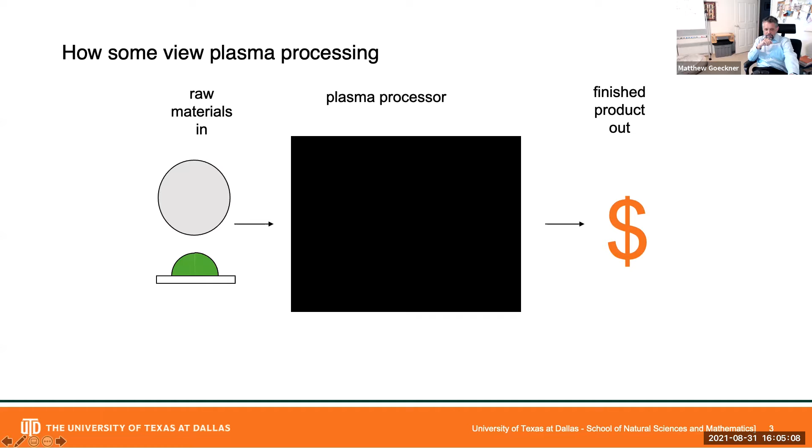Oh, please let me go on. There. Okay. So when I was at Princeton, I put together this slide for the graduate students about how some people view plasma processing or plasma physics in general. You put a bunch of raw material in, it's a black box, and out comes lots and lots of money. The reality is a little bit different. You put raw materials in, you're not quite sure what goes on, and out comes some money. And really, the desire here is to understand what's going on in that box better, so that instead of a few cents out, you actually get a lot of money out.

A case in point, plasma processors that are used in the semiconductor industry, a single reactor might sell for $5 million. I believe David has something that he works with that is on the order of $100 million for patterning. Now, it's not quite processing, but it does use plasma physics. And that's a lot of money to throw at something. And on top of that, you're working in a clean room, and it's thousands and thousands of dollars per square or per cubic foot. And you're trying to make do by punching out a bunch of devices that are 5 cents a piece.

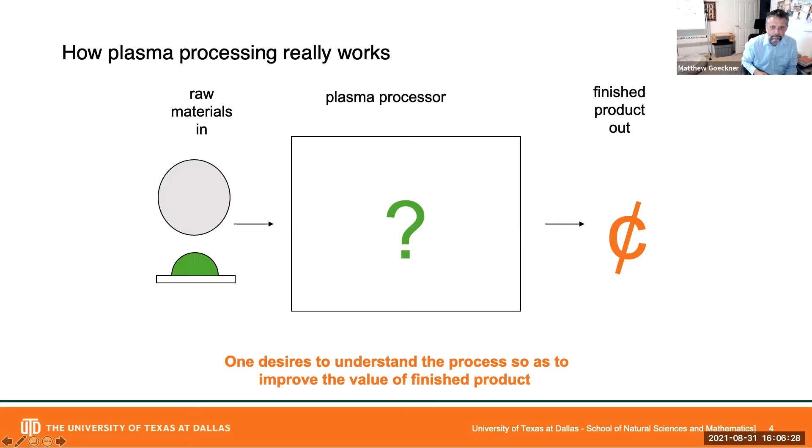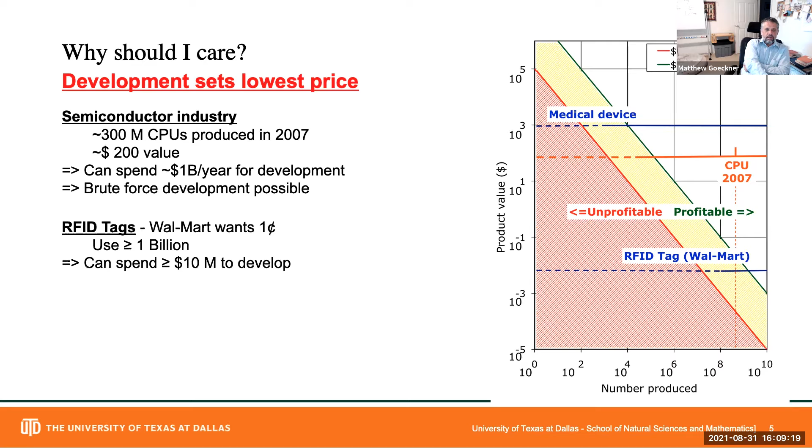You would have to have billions of them, tens of billions of them, and you'd have $10 million to do all of the development for it. And so it becomes very difficult to actually make this work. In order to make this have economic sense, one needs to really understand what it is you're doing so that you can, from the get-go, come to a solution that makes sense for whatever process you're trying to develop. And here's what I said in words. You need to understand the fundamentals.

You will have the sheath at the edge of the plasma. The ions will be accelerated across the sheath. They'll bombard the surface, giving energy to the surface, allowing reactions to occur. That's one way in which these things can interact. Surface kinetics: you can have processes occur on the surface, liberate gas that goes into the gas phase chemistry that interacts with the electrons, changing the electron energy distribution function. And so all of these things interact.

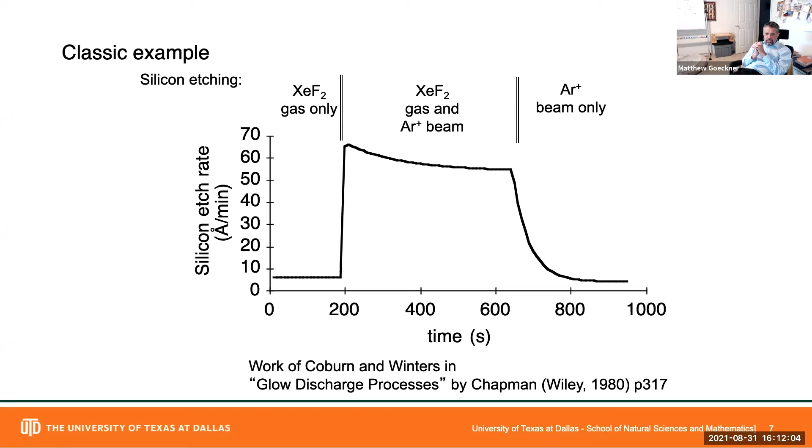They then pumped out the gas, and now you have just physical sputtering. You're basically doing billiard balls on the surface, knocking the surface atoms off. And you go back to about 7 angstroms a minute of removal of surface material. And so you have this interaction between the chemistry and the energy that's brought to the surface, the bombardment due to the ions. And this happens in plasmas. And this allows you to do things that you cannot do in any other system.

Plasmas have been known for 150 years. What have we learned? So in terms of understanding these interactions, the simplest thing that you can do is what's known as a global model. It is essentially 0 dimensions in velocity space, 0 dimensions in physical space. It's what the plasma system is doing as a whole. You ignore the plasma sheath, you ignore the surface, well, not the surface kinetics, you ignore the variations across the system. And this allows you to get some sense of what's going on in the system.

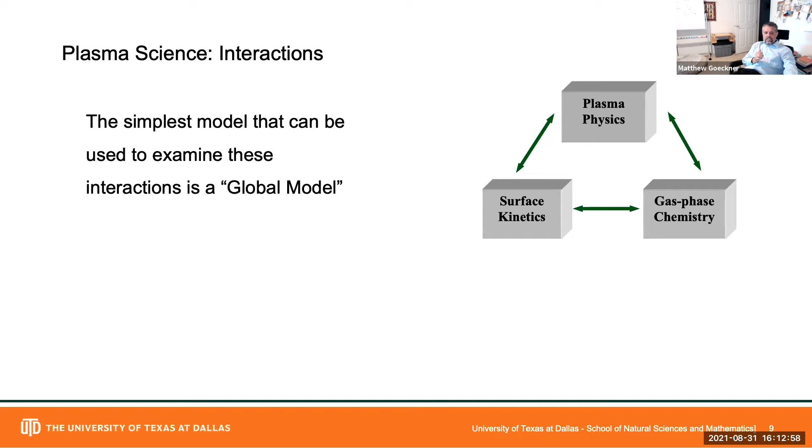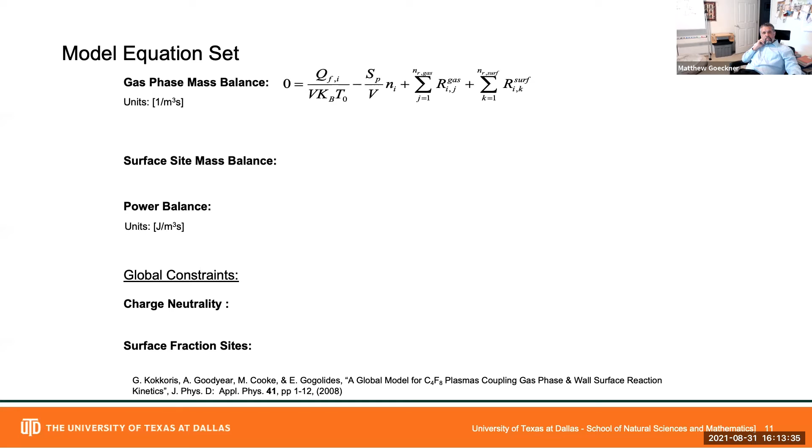So this is work we did where we developed our own version of a global model. It assumes it's well mixed, and you can use it to study molecular wall interactions, among other things. And it has potential to save a bunch of time and resources. So this model looks essentially like this. You have a gas phase mass balance where you're producing the gas through some process. You're either pumping it in, pumping it out, breaking it up, or recombining it. You have surface processes.

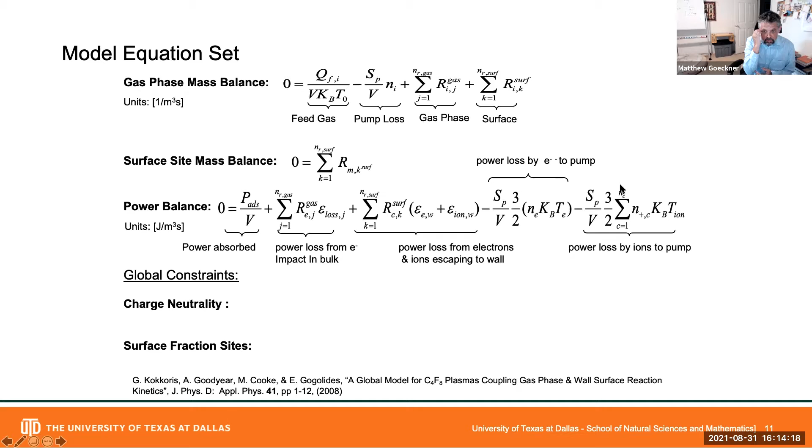You have a power balance where you're depositing power into the system through your electrodes, either through the electric field or the magnetic field. There's power absorbed, there's power lost to the electrons. The electrons and ions go to the wall. There's power lost to the pump. Electrons will get sucked out of the pump, ions will get sucked out of the pump. There's a couple of constraints, charge neutrality, and then there's the surface.

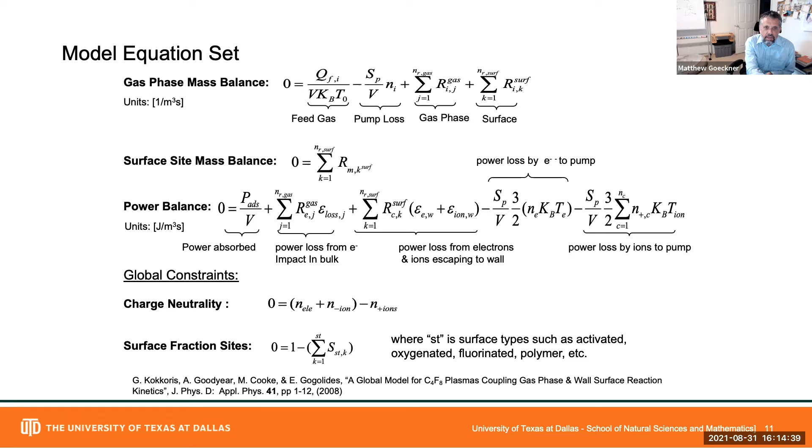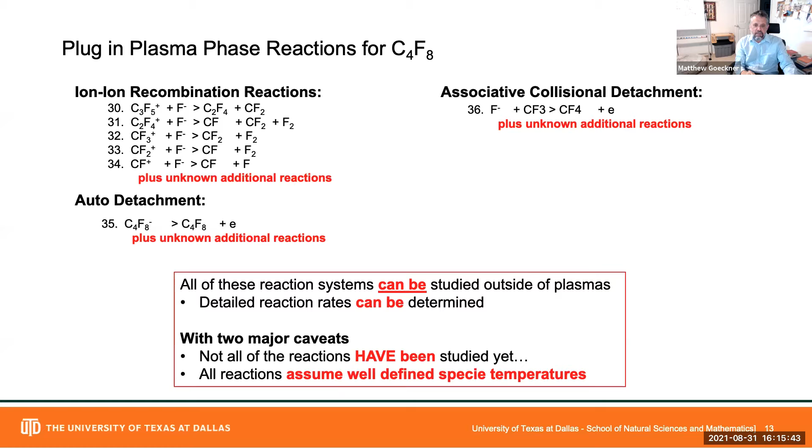You have ion-ion recombination processes. You have detachment. You have associative collisional detachment. And there's a bunch you don't know. But we can kind of guess what these reaction rates might be. And in the right system, we can actually determine values for these. There's 2 major caveats. Not all the reactions have been studied. We don't know all of them. And it's assumed that all reactions have well-defined species temperatures.

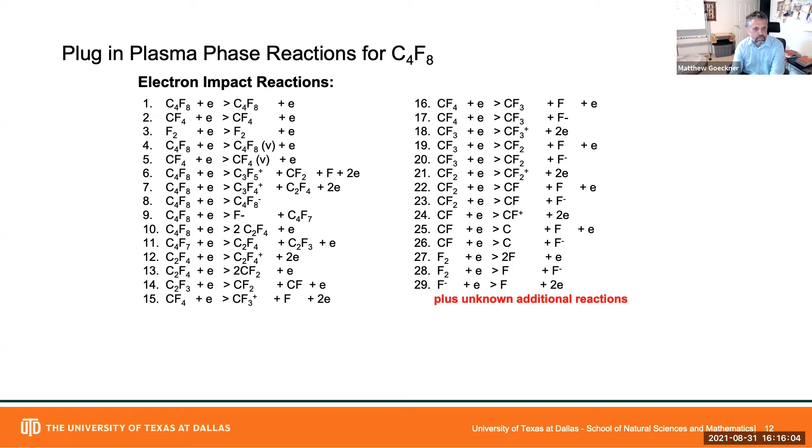So here, for example, the electron energy distribution function is going to play a major role in how this reaction occurs. Slow electrons will typically not do it, fast electrons will. So we put this together, we plotted out what we expected the neutral densities of different species might be in the system as a function of power that you put into the system. We were not the first people to do this. Kokkoris did this a couple of years before us. We got the same answers that Kokkoris did, or close to the same. Not surprising, we're using largely the same method.

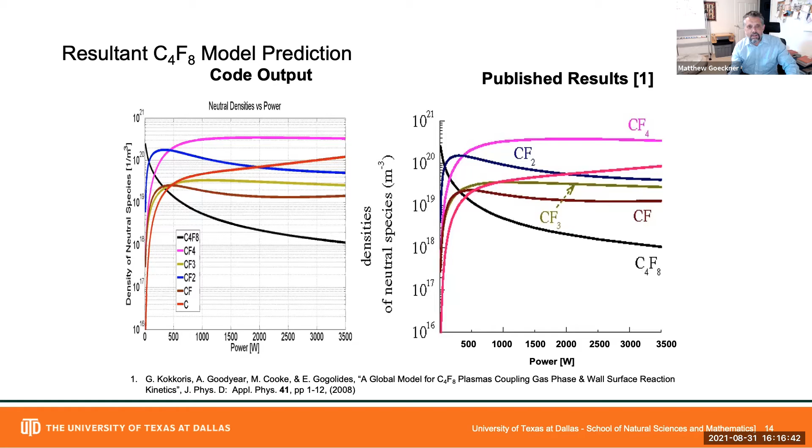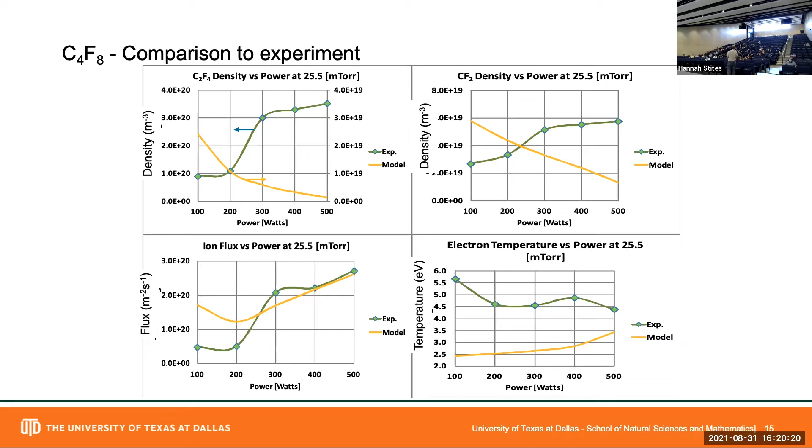And what's the inhibitor on the sidewall? Yes. Teflon, CF2. Yeah, okay. CF2N. It's a long chain of CF2N. Yeah, Teflon. Okay. And so this CF2, actually in our experiments, we were able to show that this C2F4, that a large fraction of it was unterminated. So you can have a stable molecule that's C2F4, where the carbon is a double bonded system.

But you can also have an unterminated version of this, where the CF2 has recombined in the gas phase. We were able to measure that recombination rate. So both of them, the unterminated C2F4 and the CF2, will produce Teflon all over the place, or a Teflon-like material. It is not truly Teflon because it's not truly a polymer.

And you're going to deposit this all over the place, including the sidewalls of a trench or a via that you're etching, or the sidewalls of your reactor. And eventually you've got to clean it off of the sidewalls of the reactor. Otherwise you peel off thin layers of Teflon. It's like Teflon tape that you use as a pipe dope, essentially. So you know the Teflon tape that you can get for screwing together two pipes for plumbing. It will look like that on the inside of your system.

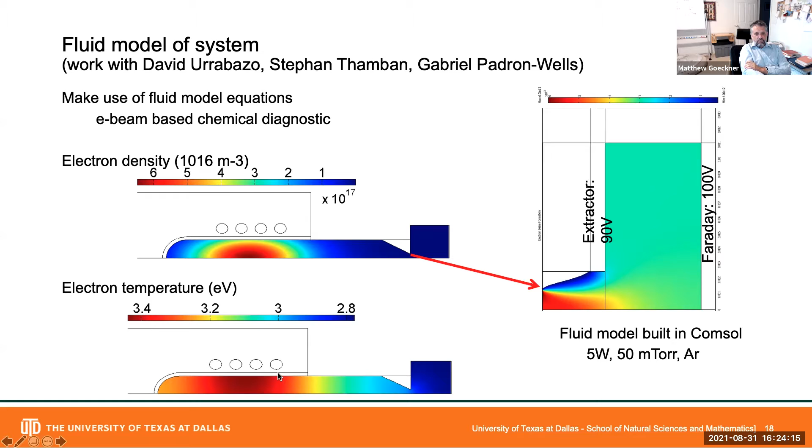So we did this model to study what was going on in the system. And we were able to plot out what the gaps should look like. And it was close, but again, it got back to the point of, with this fluid model, you're making assumptions about what's going on in the electron source. If I have a bunch of high energy electrons in here, it's going to change the flux of the electrons that come out of the gap because of the potential structure.

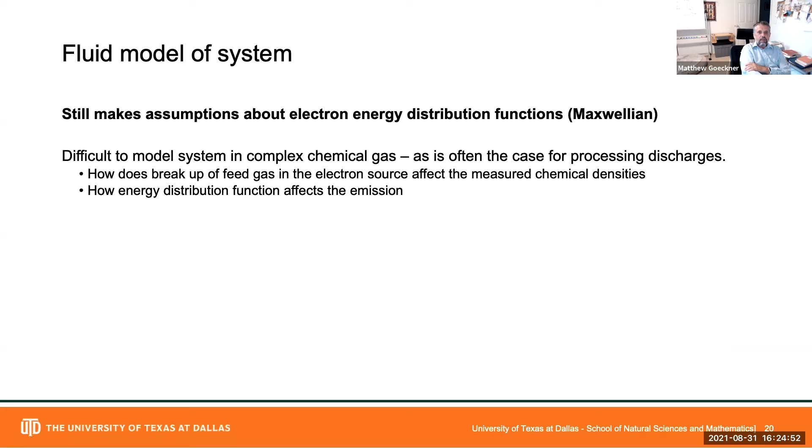Things become even more interesting. We've done a lot of work in pulse plasmas, where you're turning the plasma on and off at the kilohertz range. You might be driving it at the megahertz frequency, and then you turn it off and leave it off for a fraction of a second and turn it back on, and what happens? You can have organic precursors. There's a huge amount of potential work that can be done here for biomedical applications. The list of organic precursors that you could put into a plasma is pages and pages long.

Atmospheric pressure plasmas is something that we're working on quite a bit in my lab. What happens in those sorts of systems? Can you change how that system operates by changing how the plasma is set up? Is it really in thermal equilibrium? That's usually what people assume for some of these atmospheric discharges.

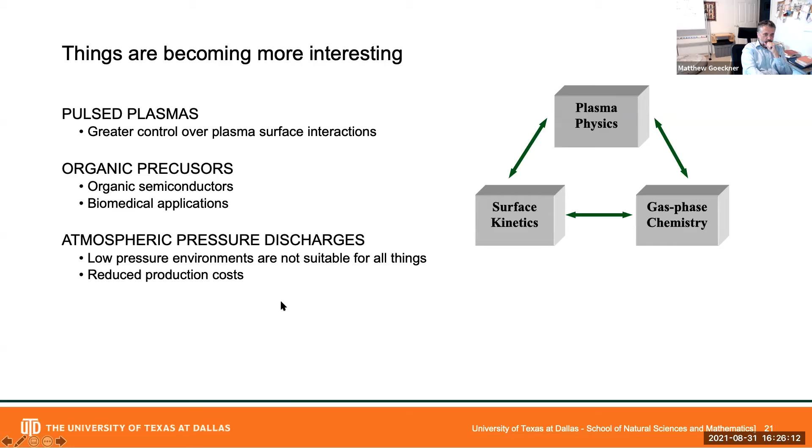So here is an example of a pulse discharge, where we're pulsing it at 1 kilohertz. It's a square wave pulse. The power is 13.56 megahertz. The system looks like this: there's a powered top electrode, there's a plasma, there's a lower chuck where you might put a wafer. When we turn it on, we see a bright glow on one side. So that would sit right about here in the system. And then we see a glow in the middle.

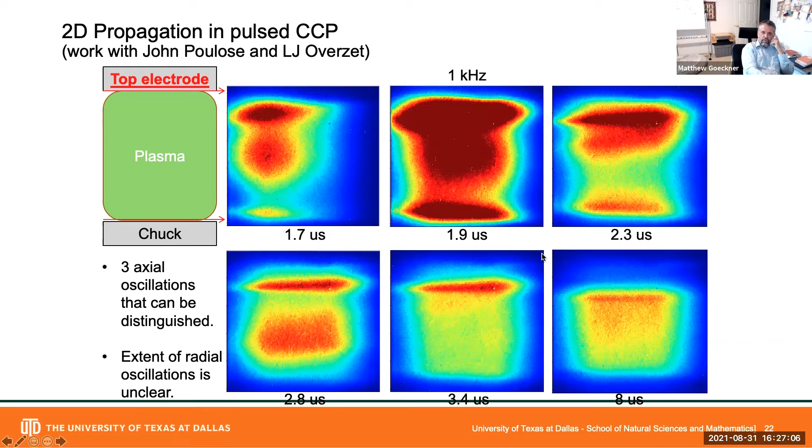The bright glow extends across the whole regime and it comes down. It looks like something's happening here. It's a little bit hard to tell with just a series of pictures. So what are we going to do? I hope this works. It worked earlier. Here's a movie of it. This is actually experimental data. Ooh, cool.

Anybody notice that bounce of the glow? What is causing that? You have waves propagating up and down the system. So here we were running in a CF4 oxygen argon mixture at 45, 45, 10. If I do this same experiment,

Oops, didn't go to the next slide, it replayed it. Come on, go to the next slide.

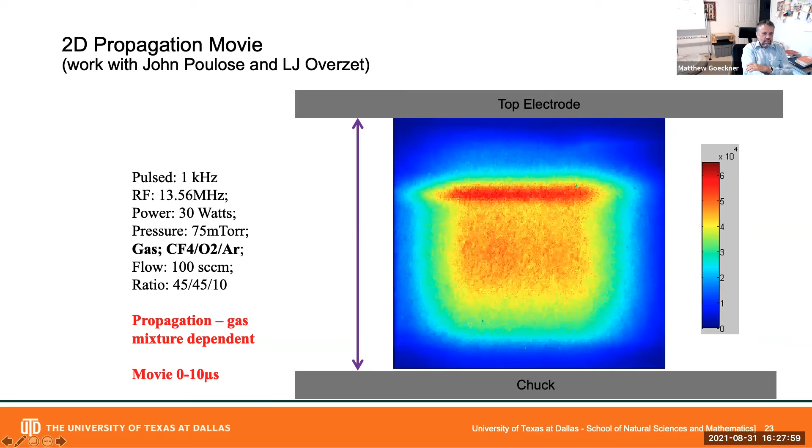Notice how different that is? We didn't change anything else other than the gas phase chemistry. This one also pulses in the same way, but it doesn't have the reaction that was occurring on the side. I think I know what that was, but it's hard to tell for sure. So all we did was change the gas phase chemistry, and we got a very, very different reaction.

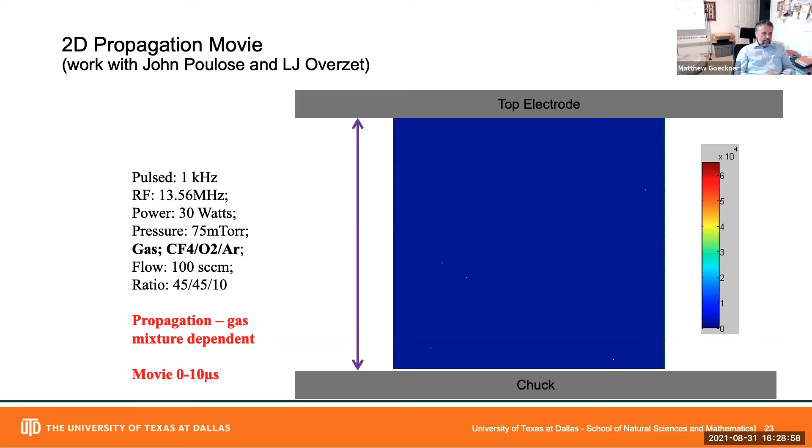And CF4 or CF4/O2/argon, those are standard systems to run in the semiconductor industry. Those flow rates, those mixtures, that pulse rate, that's all common. And if you're getting this big of a difference going between gas mixtures, how can you ever be sure that you're going to get the same result twice? How can you understand what it is that you're doing?

Of course, it wants to flow again.

What does this mean? Does anybody want to tell me what this means? Those of you in plasma should have some. What does the emission mean? I mean, are they still there, David? I'm here. I mean, the emission is proportional to the number of those atoms that you have. Is that what you mean? Yep. What else does it depend on? Well, you have to excite them, so you have to have enough electrons to be able to make these transitions at those energies.

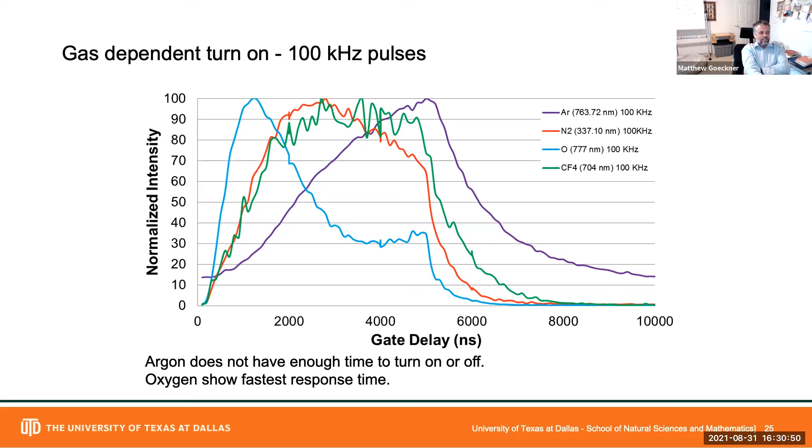Did the students answer, or is that you? That's me. I don't know, they're all asleep. No, they're not. Okay. They're all great. We'll hit the bars in a bit.

Okay, so here's what the emission is. There we go. There's an electron energy distribution function. It's some sort of distribution function. There's a cross section that's velocity dependent, and it's an integration over all of the velocity at that particular point in space. And so your emission can be time and location dependent because the velocity distribution function is time and location dependent. It's also dependent upon the species in the system. Remember, if I change the species in the system, I'm going to change the collisions, which is going to change the distribution function. The cross-section will be species dependent.

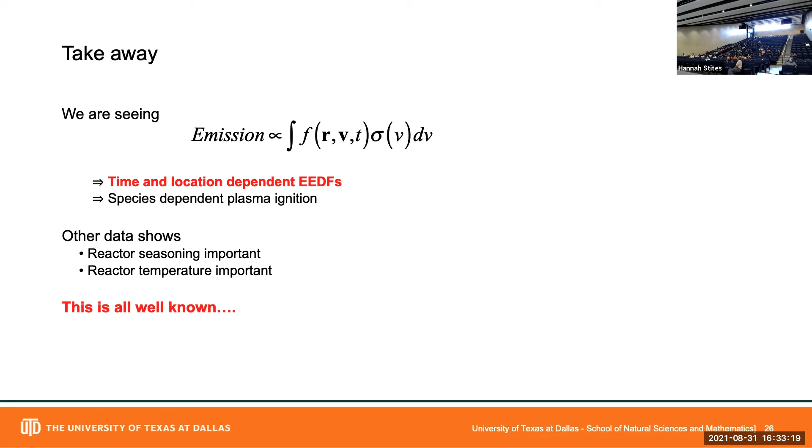All right. Okay. What happens if I now raise the temperature to 200 degrees? Goes up. Why? Ideal gas law. I'm sure someone said that. Ideal gas law is one reason. Okay. What else happens? Think of it, what happens with water vapor in your chamber if you go above or below 100. Yeah, outgassing comes off the wall. Outgassing. So reactor temperature becomes very important because you can push water off the walls. You can push lots of things off the walls, but at the very least, you can push water off the walls.

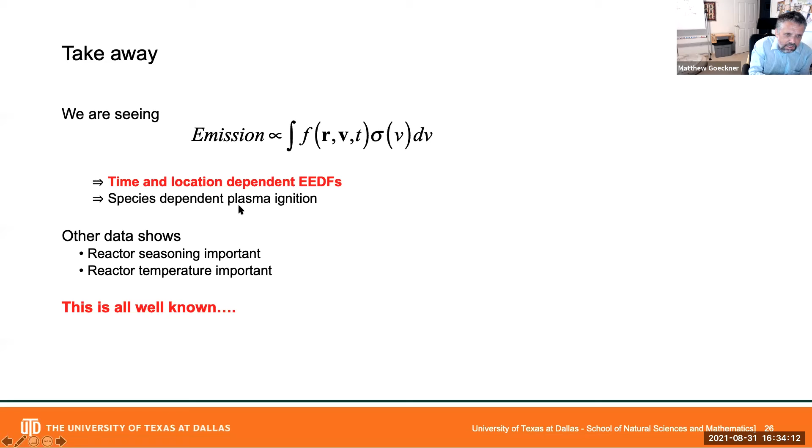And we did studies, Joe Checky did studies years ago, where we looked at the water coming off the walls and how this affects distribution functions and potentials. And it has a huge effect, and it's just little bits of water, okay? And so all of this that we're seeing, those last few slides, you're seeing these huge differences because the distribution function is changing because of this and this.

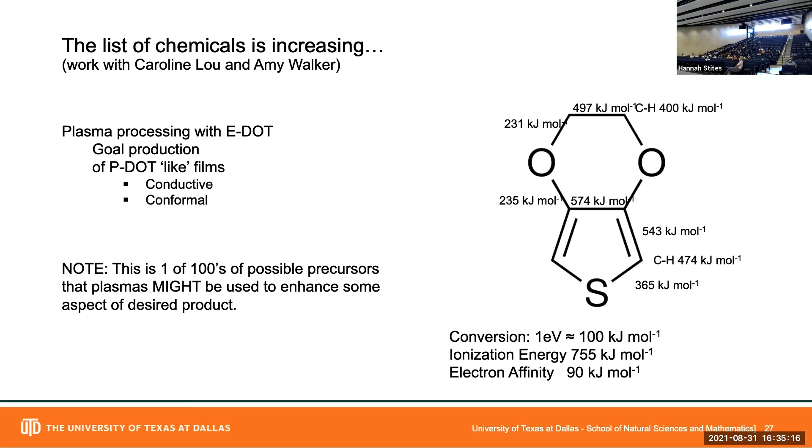And you want to guess what we found? I will answer in a minute. Anybody want to guess? Did it work or not? Let's see, you haven't founded the company and aren't driving a Ferrari and jetting around, and you're still talking to us on a day job. So I'd say no. That's not the right way to think about it. Okay.

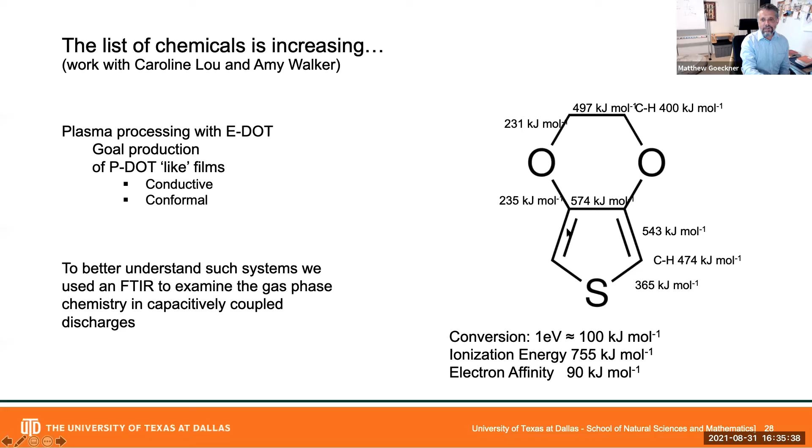So we use an FTIR to measure the gas phase densities. And actually, these are the CC bond stretch. So there's a double bond stretch that we're looking at. So there's an anti-symmetric and a symmetric. It's a measure of how many of the bonds are in there. And so what we're finding is that we're breaking one of these double bonds, if not both of them. The other place that we would really like to break it is the carbon sulfur bond that sits right here. And what we find is that it's essentially constant no matter what we do with the plasma.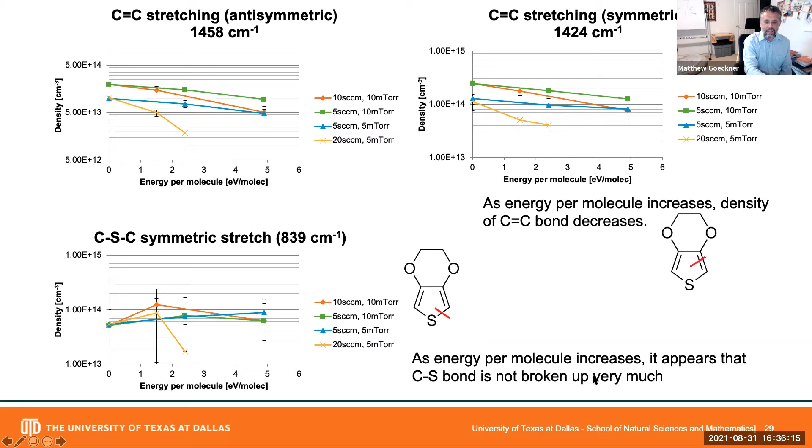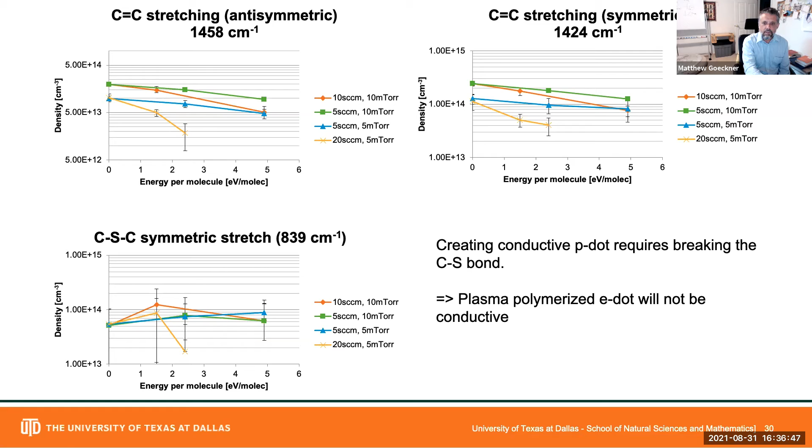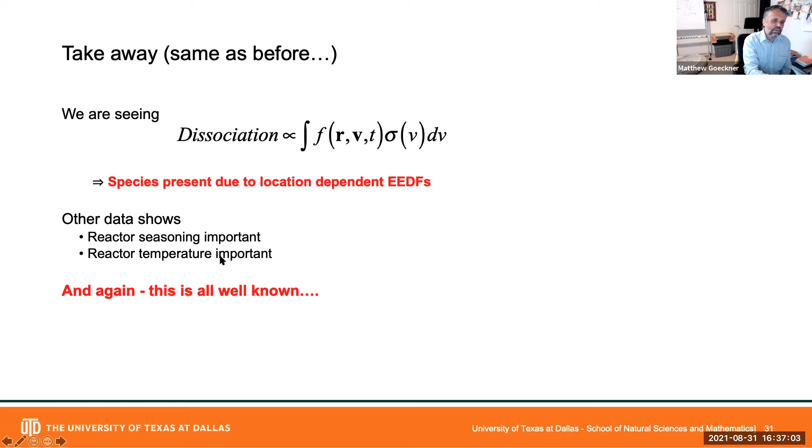The problem is that in order to make a conductive PEDOT, we actually have to break the carbon sulfur bond. And we cannot tune the plasma in such a way to get it so that we preferentially break that. The pi bond for the carbon-carbon double bond is much weaker than the carbon-sulfur bond. And you need the carbon-sulfur bond to break to make PEDOT. So it is not conductive. So we get back to this dissociation. Again, there's a cross section, there's a distribution function of the electrons. Reactor seasoning again, reactor temperature, same takeaway.

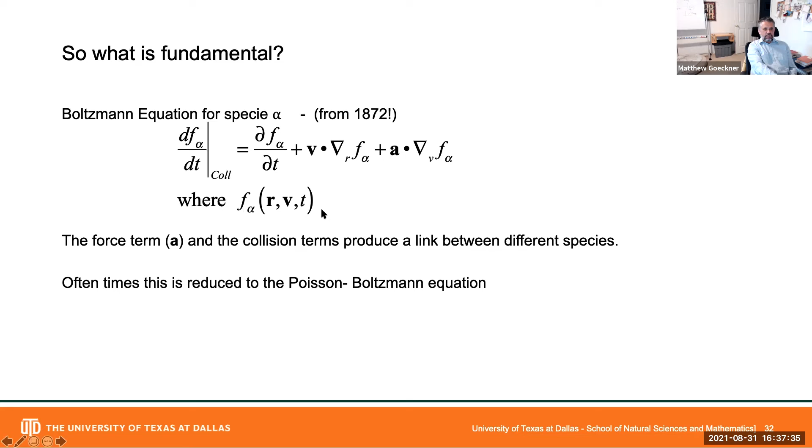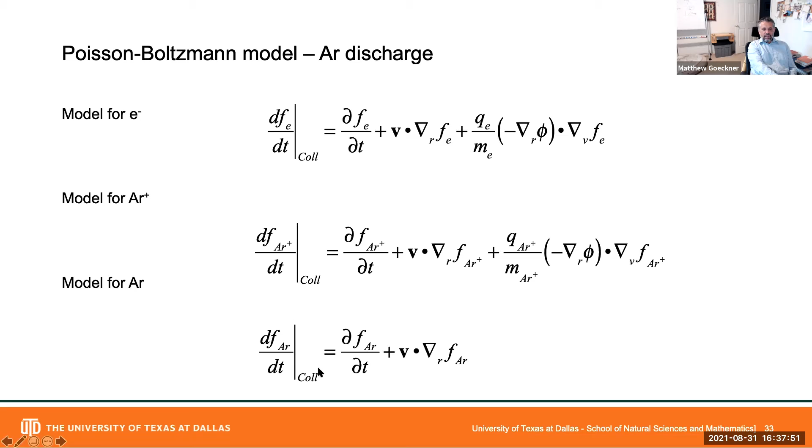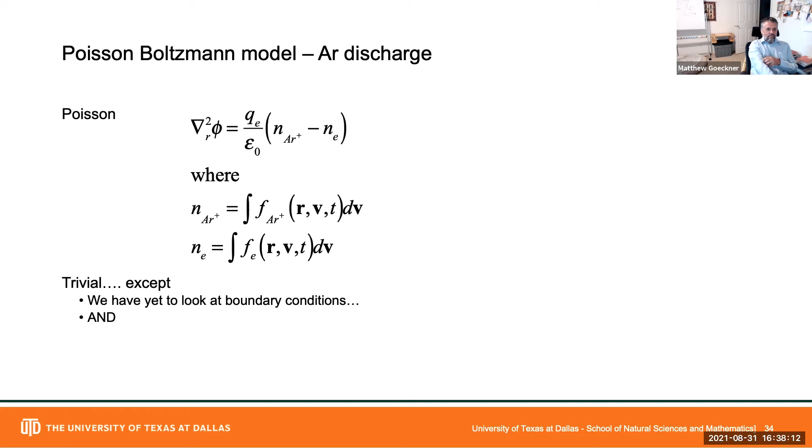So what is so fundamental? Those of you who suffered through my class this spring know that the Boltzmann equation is the critical equation here. And you folks in 527, right? All right, okay. Yeah, this equation is the critical equation where the EDF or the distribution function is really important. You can have a Poisson-Boltzmann model for argon discharge. Here you have the model for the electrons, the model for the argon ions, and the model for the argon. You add in Boltzmann's equation or Poisson's equation to determine the local electric field, and all of this is trivial. I'm shaking my head no. We still have boundary conditions, but potentially you can model this with some sort of fluid model.

Well, there's another problem. This is the work of Mark Kushner. For those of you who don't know who Mark Kushner is, he is probably the preeminent plasma modeler for low temperature plasmas, and has been for 20 or 30 years.

David, is that a correct statement about Mark? Absolutely. Mark was here as a professor for most of my career. We were friends, worked together. He moved. He was a dean, and then he's at University of Michigan now. They gave him a big giant plasma science center. But yes, if anyone in the world can model a plasma, Mark can. Yes.

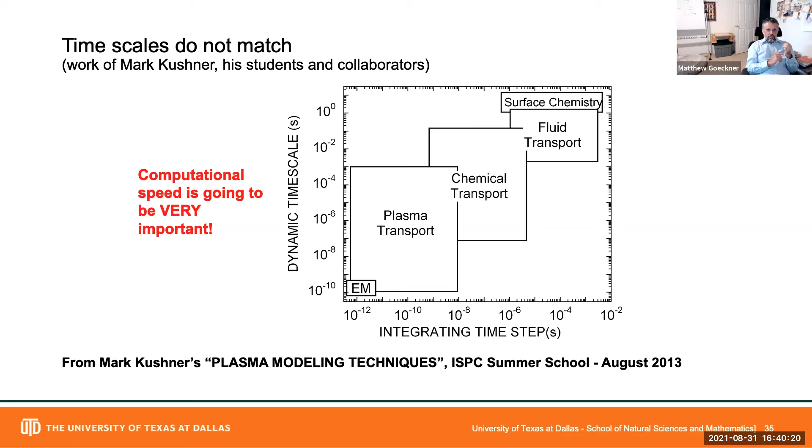And so here's one of the fundamental problems. If you're trying to look at the electromagnetic fields, the time steps that you need to use to get the fields right are 10 to the minus 12 seconds. If you're trying to model surface chemistry, 10 to the minus 4, 10 to the minus 2. So there's this huge discontinuity in what happens in the plasma models. And you have to break them up. You have to simplify things in such a way that you can link them up. If I'm trying to study what's going on the surface and I have to have 10 to the 8 steps for every time I make a step in the surface chemistry, I will never get it done. And so these differences in timescales have huge implications on how you write code and what you have to do to get the code to even come close to being right.

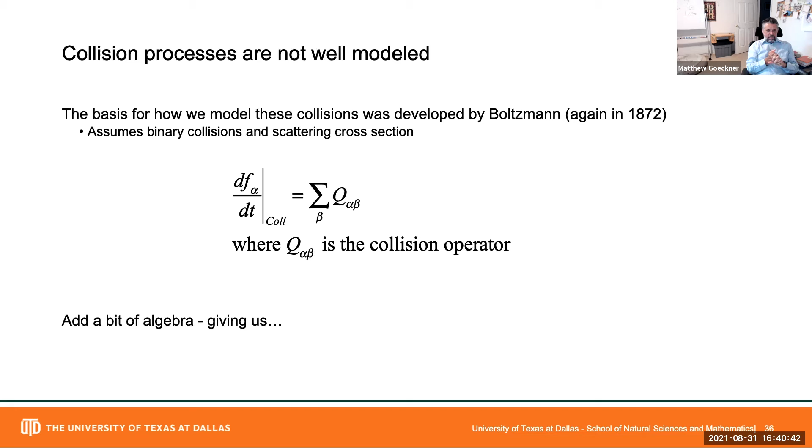If you want to calculate these collisions in 3 space, that's an 11-dimensional integral. It's very expensive to calculate. And so we've done work where we've cut it down to 5 to try and do a better job. And there's other ways to get it. I'll show you a little bit later, but it's very expensive.

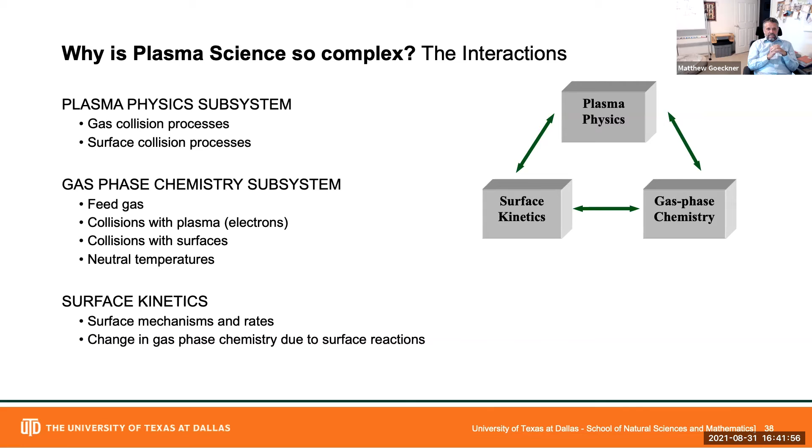Last but not least, let's go back to the why is it so complex? It's the interactions. We have a whole bunch of unknowns. We have time and location dependent electron distribution functions. Calculations are computationally intensive. The EDF is very critical to many processes. There's species dependence on what the EDF is. We don't know a lot of cross sections. There's a lot of species that might be in the discharge. We don't know what they are.

Oh, there's this minor problem. Does anybody know what a secondary electron is? Sure do. They're nodding their head yes. Somebody want to explain what it is? Come on, Zach, you can do it. I saw you nod your head yes. Right. I don't know if you heard that. He said it's the electrons that come off from the surface of your vessel.

Yes. So what happens is you can get this from a number of processes, but say you have an ion coming to the surface that has 10 eV of energy just as it hits the surface. About an angstrom above the surface, you'll get an Auger electron that will jump across and neutralize the ion. Occasionally, you will get a second one that comes at the same time. And there are other ways that this can happen. But this second one has no place to go. It is not neutralizing the ion. It now is in the sheath and goes flying out away from the system. And so you're producing all of these secondary electrons.

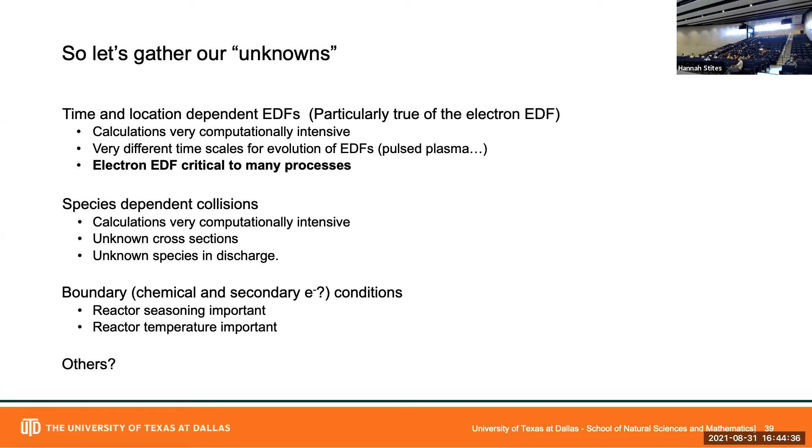The study of secondary electrons is from the 50s and 60s, and they probably get it right down to 1/10 of an eV, 100th of an eV. Well, that's great, but a plasma also has something else at its edge, and that's the sheath. That means I now have an additional electric field. So here is my surface. Can you see my hand? Yeah, small, but yeah. There's the ion. There's this huge electric field between the two. If I impose on it another electric field, now what am I doing inside my surface? I'm drawing more electrons to the surface to try and balance that out.

And so if you have a sheath present, there is reason to believe that the secondary electron coefficient changes because of the sheath. That has not been proven to my knowledge. We tried, we couldn't get the experiments to work. But Gary Eden, who was at Illinois, what? He still is, just because you go emeritus. Oh, he's emeritus, okay. He did lots of work which showed that the secondary electron coefficient changes with that electric field. And so that's an unknown. We don't know what's going on.

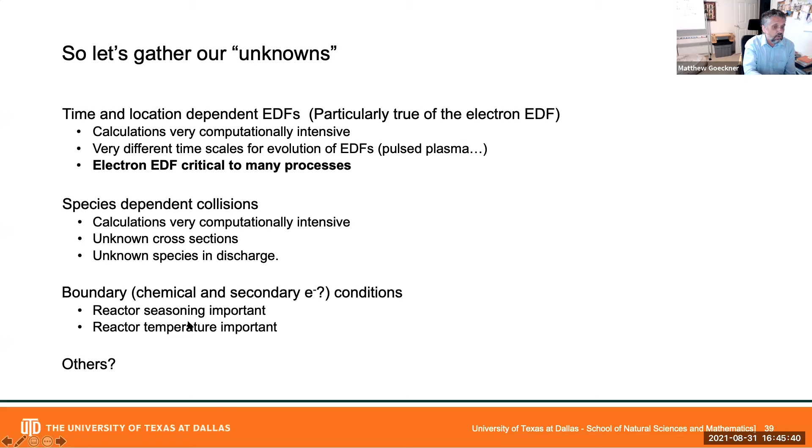There's also this problem of how plasma science has been focused, at least for the low temperature plasma science. A lot of it has been focused on what can we do, not why it works. And this was possible because of the economics. There was so much money there that you could just throw money at the problem and get people to turn knobs until it worked. Now it's a little bit more elegant than somebody turning knobs. There were designed experiments to find regimes that work. But people spent a lot of hours trying to figure out what would make this work and that work. And we're down to 3 and 4 nanometer scale lengths. Could not do that any other way. There's a lot we don't understand.

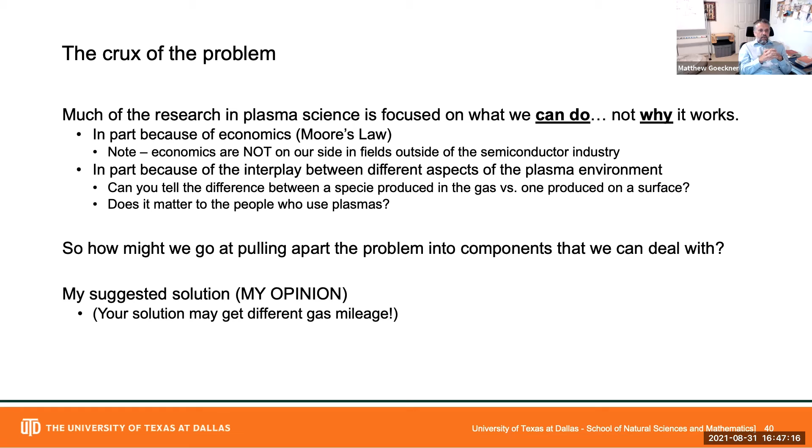So I'm going to start asking the question, what can we do in order to truly understand this so that we can use plasmas other places where there is potential use to improve the human condition, improve how the world works. But we don't have this economic ability to just throw money at the problem. Medical is an example. So here is my suggested solution.

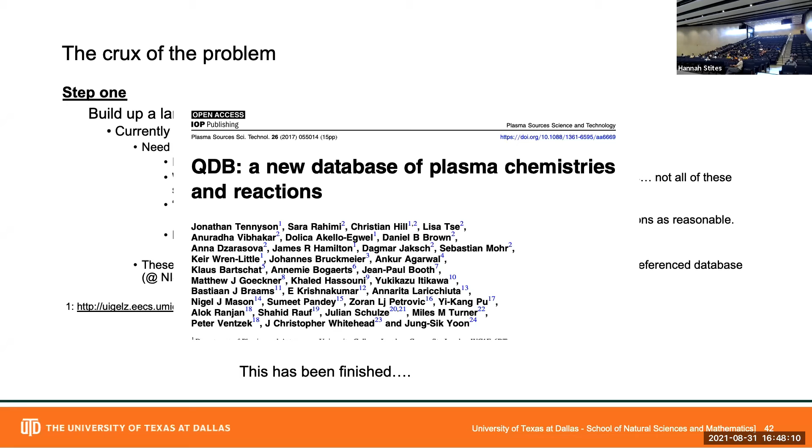One, we need to have a large collection of electron impact cross sections, and it needs to be coordinated in such a way. When I first put this talk together, there was a whole bunch of them. That's been done. I managed to con a bunch of people into putting this together, and we have it. You notice they even were nice enough to put my name in the paper. Is that in LXCat as well now? What? Is that in LXCat, the cross section database? You're going to have to say that again. Can you get to this database with the program LXCat?

So you get the data to this database through Quantemol. And I believe that it's available in the journal, but there are some parts that you probably want to go to them to get it. But it is a database. This was started not unlike the atmospheric science people, who, to study pollution, put together a database like this that we use all the time to get absorption cross sections for our IR measurements. HITRAN is the atmospheric version of it.

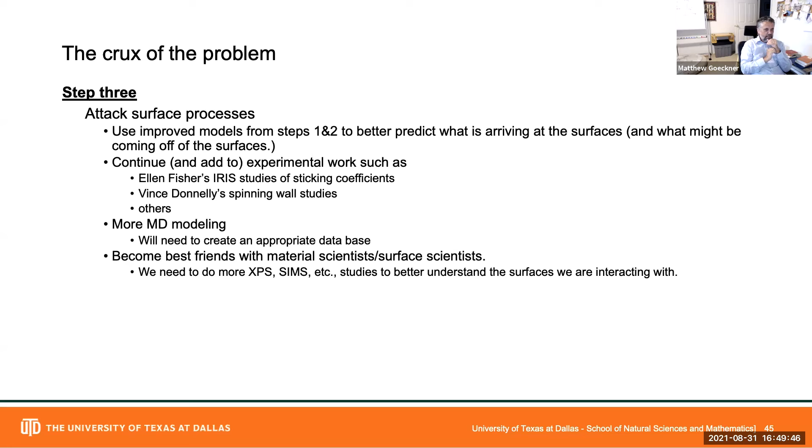Step 2, we need to optimize computer simulations, and I'll come back to this in a minute. Step 3, now that we understand what the collisions are like in the gas phase and understand what's going on with the EEDFs better, we can now look at just the surface processes by themselves. If we know the other two really well; we can't do this before that point. Otherwise, it'll get lost in the unknowns for the other ones. So going back to step 2. Trying to understand what the EEDFs are is really tough, and this is the fundamental problem.

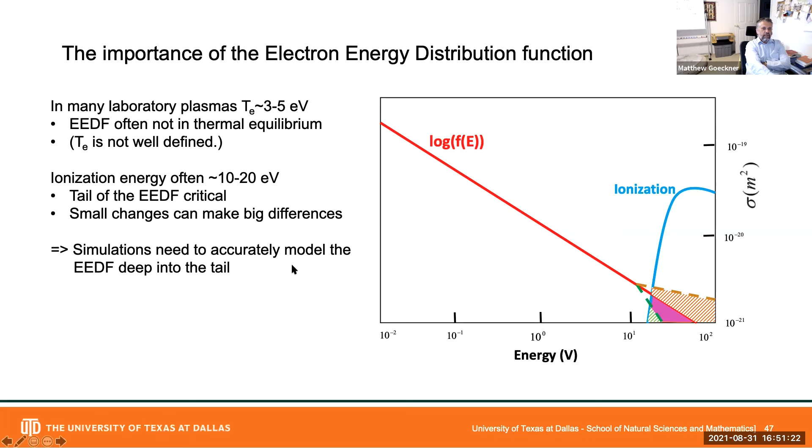And remember, our temperature is 3 to 5 eV. So you're several Te out. You're several standard deviations out from the center of the distribution. So we need to model these accurately deep into the tail. And this shows up here and here. And we've come up with two different ones. One is deterministic, where we're actually integrating the collision kernel, and the other is stochastic. You can think of that as Monte Carlo.

How many people know what Monte Carlo is? Oh, half the room raised their hands. We got a lot of neutron people here, you know. Okay.

Okay, so Monte Carlo, the city where they gamble; Monte Carlo is effectively rolling the dice. You're looking at random processes. And Monte Carlo in this case is random collision events. And there's a certain amount of an art to it. The original version of Monte Carlo was done by Bird, which is known as direct simulation Monte Carlo. What Bird did is he put a bunch of particles in phase space, and this is just the velocity part of it, and shaped the distribution.

Each of these little dots might correspond to 10 to the 8 or 10 to the 10 electrons or something like that. And each of them corresponds to the same number of electrons. So when I multiply the weight times the number of particles in my Monte Carlo, I'm going to get the probability distribution function, or the EEDF as you would know it.

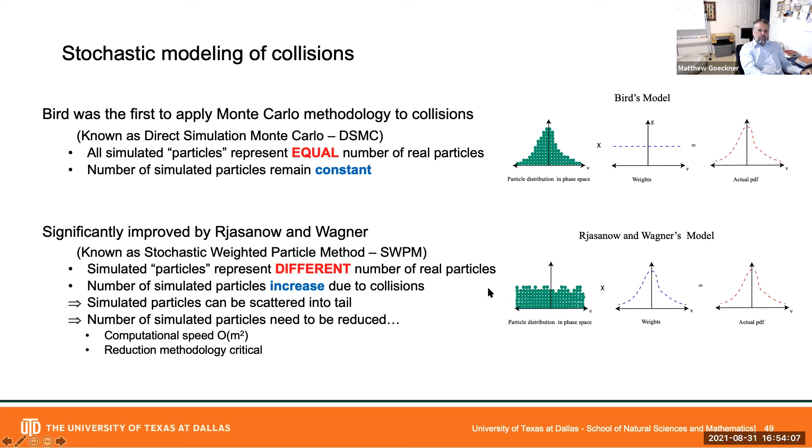You probably don't need to know this. This is the reduction scheme.

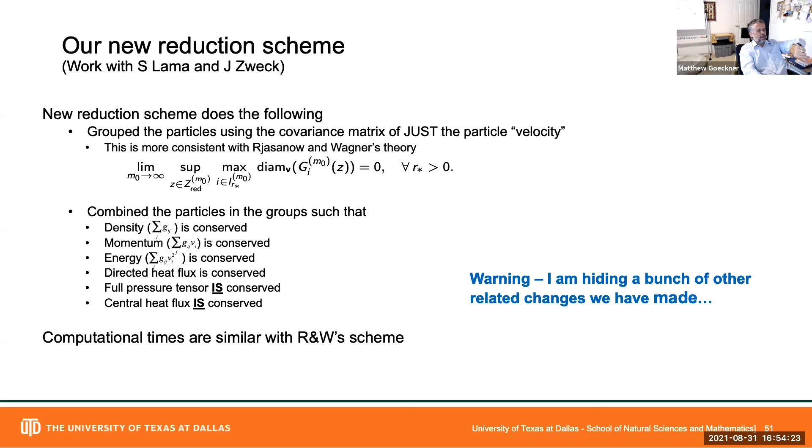Yeah, your host is standing up. My host is standing up. That's me. That means we're about done.

Okay, so we were trying to measure it. We had different group formation techniques, and we're grouping particles. So with the stochastic weighted particle method, you break up the particles when you have collisions, and you have to recombine them. Rjasanow and Wagner conserved energy, and what was the other one? We conserve heat flux. So we actually conserve up to the third moment of the distribution.

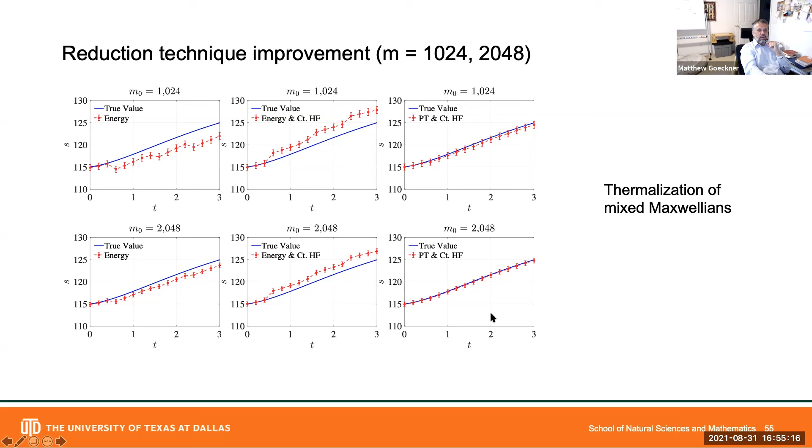So this is the new stuff on this line. This is what Rjasanow and Wagner did. And you notice we're getting to the correct answer a lot faster than theirs did. And so we have a considerably faster scheme to get deep into the tail. So if we have a temperature of 1, we can go 4 times the temperature out, and we're accurate. And so now we have a methodology to look deep into the tail of the distribution function.

And at this point, we're trying to work with folks at Sandia to implement this on some of their code, with the eventual hope of putting it into simulations that we can use to actually model plasmas in a better way and understand what the distribution functions are doing better.

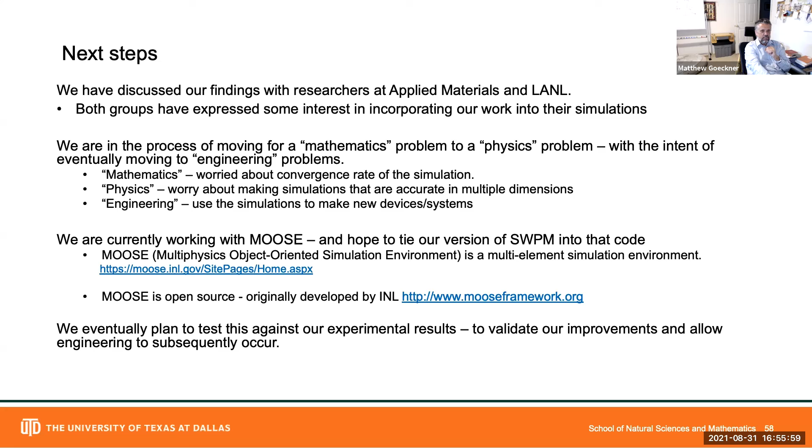So David, I got to the questions. Okay. I've got a whole bunch of places. And a third of the people here do plasma. So, okay. Come on, let's get one good question. Stand here all day.

Yes. Sorry, I don't do plasma, but I have a question. Are any of your experimental results sensitive to the initial condition or initial experimental setup? Take your CF4, oxygen and argon mixture experiment, for example. It seems that you have a one-time measurement, and I'm just curious: if you have a tiny difference in your initial composition in your mixture, does the result vary a lot in terms of time?

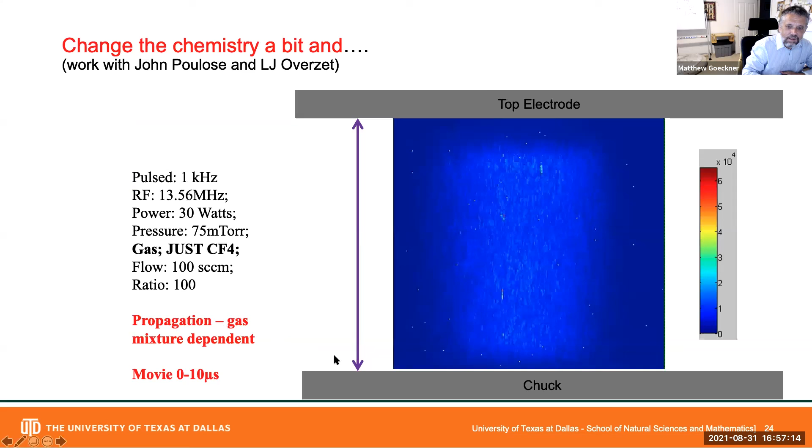So you're talking about the movies. Yeah. So let's go back to the movie quick, if I can get it to go. This movie, first of all, we took this time sequence in random order. The other thing that's important here is this was 30 hours worth of data collection. So if there's variations that are due to variations in the gas mixture, it should wash out because we took the time sequence in random order.

And the other thing is that each of those pictures hidden in that file is 45 minutes of runtime. So short-term variations are not affecting us. Long-term variations are not affecting us. We were measuring the voltage and the current going to the powered electrode. The changes were a couple percent. Some of the runs we had were 3 days, and it was a couple percent over 3 days. We did not start taking this data until after the system had been running for an hour or two. It was stable.

Thank you. Sure. Any other questions?

Hey, has this new database improved the results of the initial CF4 modeling at all? I don't know if they're connected or not. David, you're going to have to repeat that. Sure, Charlie, it's pretty far back, but the new database that you worked on getting everyone put together, if you apply that back to your first models, would it improve it?

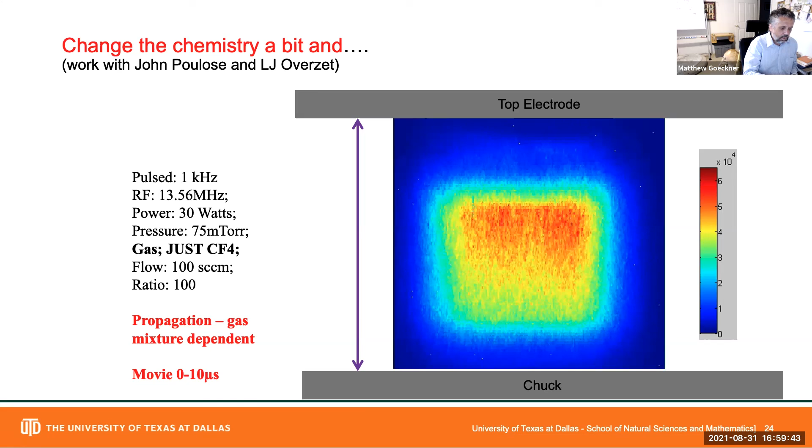So they're in the process of writing a new paper, and I was going to be part of that new paper and do exactly that, but I have not had the free time, and so I backed out of helping. But that is on the list of things I wouldn't mind doing, I just haven't had time. All of this work trying to get the EEDFs deep into the tail, wherever it went. Yeah. Those pictures, that's a couple of years worth of work right there.

Yeah, and I'll tell you that's key. If people are in my 5.7 class tomorrow, we're going to talk about exactly this type of thing, because all those reactions are up at those high energies, the electrons, and little variations there make huge differences in what you get. So Matt, very timely lecture.